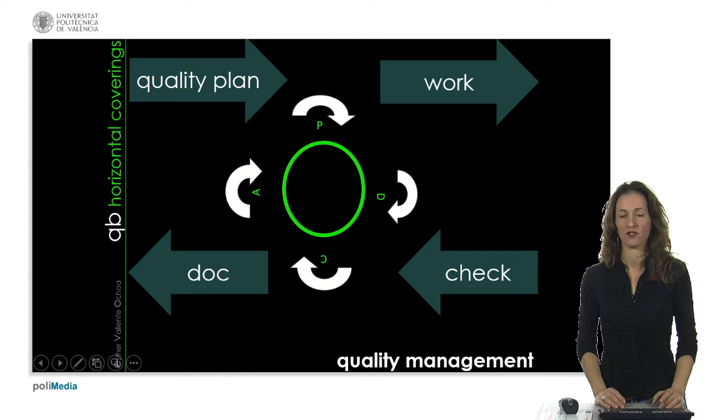We should think about the quality plan and the whole project management before starting the construction, the worksite construction. Then it's time to check all the activities, and in case we find any failure or damage, we have to make a non-conformity report. This document is usually joined with a corrective action or a preventive action in order to repair the failure or to prevent the repetition of this damage in the future.

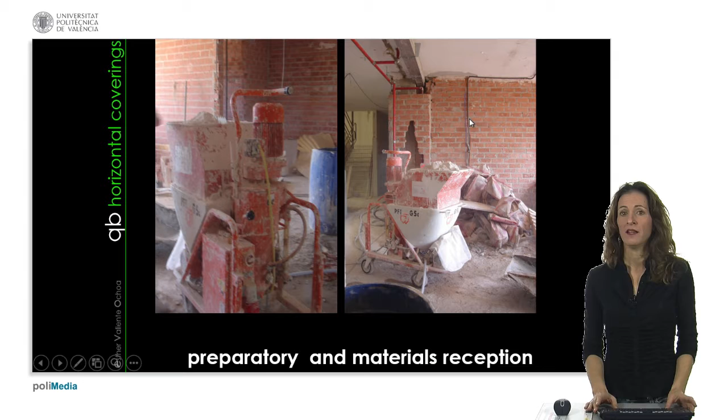Right now, let's go see the gypsum finishings in the horizontal finishings. First, we have to think about the preparatory work and the materials reception. Think about the structure, facade, all the partitions, even if this is a brick wall or a plasterboard wall, it doesn't matter. All the previous units have to be finished, all the building services have to be completely placed, and then it's time to start with the coverings.

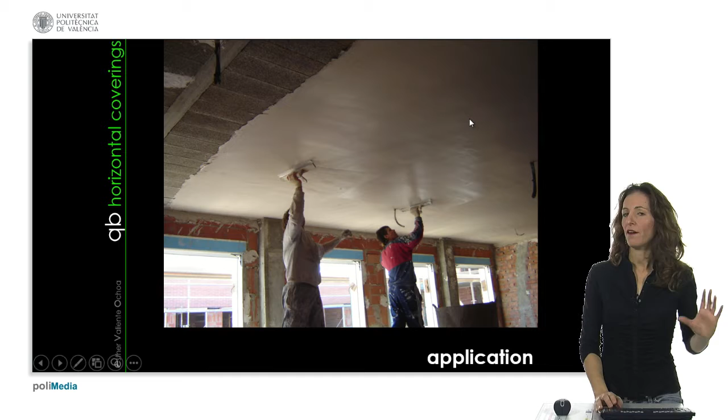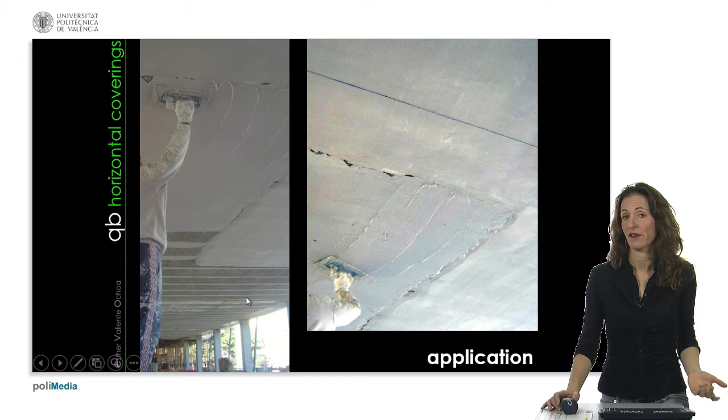When we are making the horizontal application, we have to spread the paste by hand, because when spraying it we can have problems with the fixation on the horizontal surface. In the first application, we have to cover the whole surface and try to fix the paste to the base. In this case, we have a reinforced concrete structure, which is the inside face of our floor or slab, and we are covering the whole surface with the gypsum paste. After covering this, we have to trim and cover the whole surface until we keep the surface in continuity.

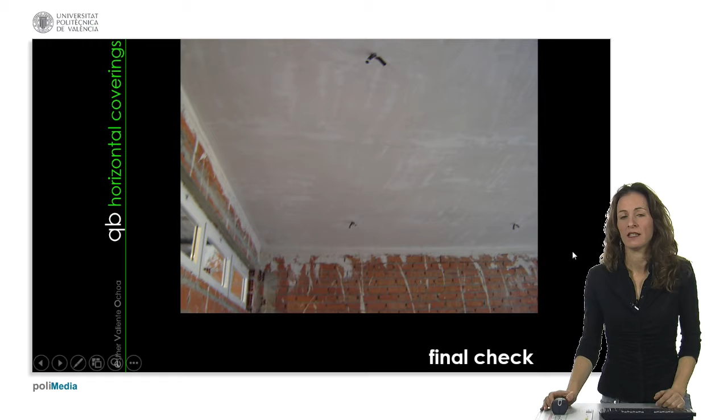It's time to wet and keep the moisturizing of our paste in order to have continuity and horizontality in the ceiling. If everything is fine, we have to be careful about where the building services are placed.

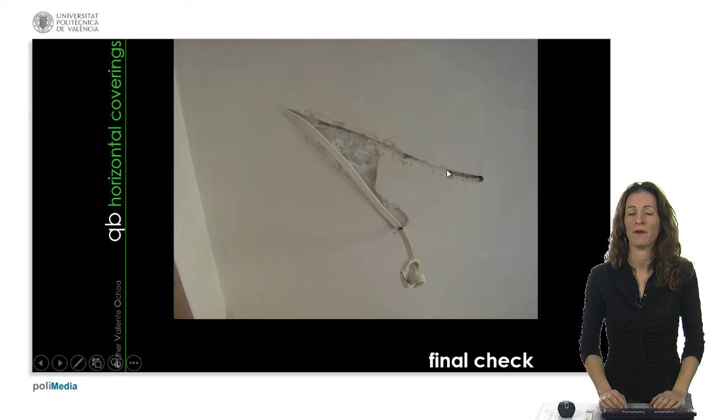In some cases, when we use electrical cables, the difference in temperature can cause a pathology or damage in our ceiling, and just cause a failure of the electricity. Where the cable is placed, we are going to have poor adherence, and we can end up removing it, having this trouble. If everything is fine, we can continue and mind the position of the building services before covering with this very thin final surfacing.

In the case of ceilings, it's very easy because we have a chamber in between the element and the final ceiling we are going to have in our stages.

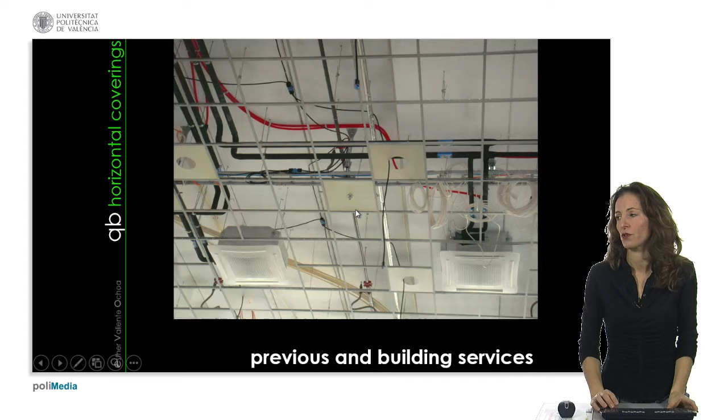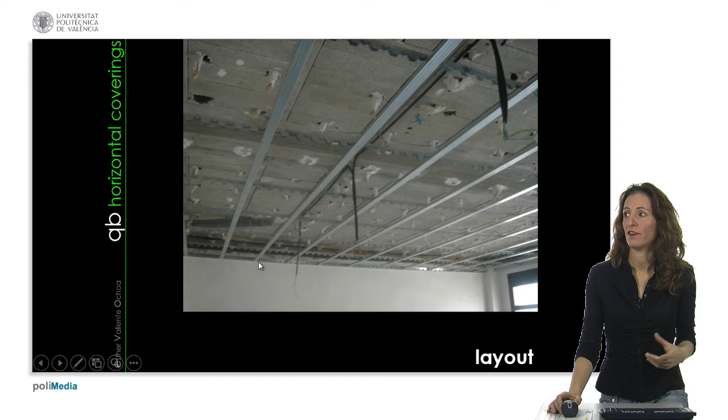We have to lay out the position of our ceiling depending on how many building services we are going to have. Then it's time to start with the layout, where we stake out with the profiles. We have to divide the whole surface we are going to cover with the ceiling according to the final shape and sizes of our panels.

In the layout we also have to fix all these aluminum profiles to the floor slab, to the resistant structure where we are going to fix the profiles, in order to be sure the structure is resistant enough to hold them in place.

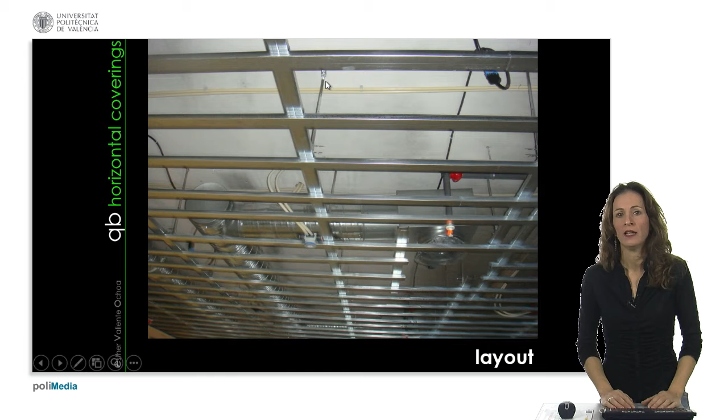Then in the layout we also have to check and test if the distance between all the profiles is sufficient, well placed, and we have the right position of the panels, because we have only a small tolerance in between, like one to two millimeters maximum. That's sufficient to move and remove the panel if needed, but otherwise the panel has to be completely finished, and if not, we can have damage or failure causing the panel to fall down.

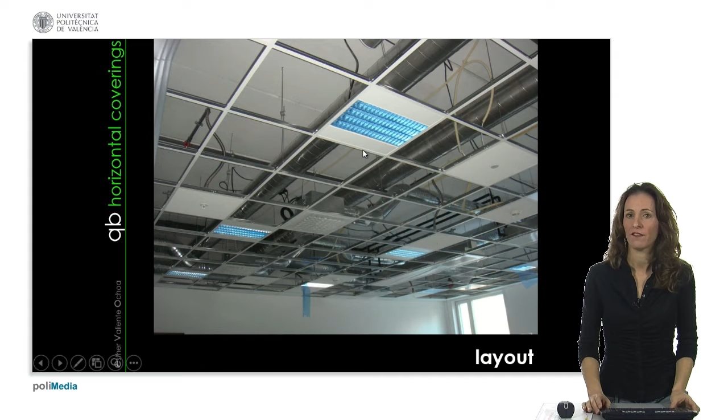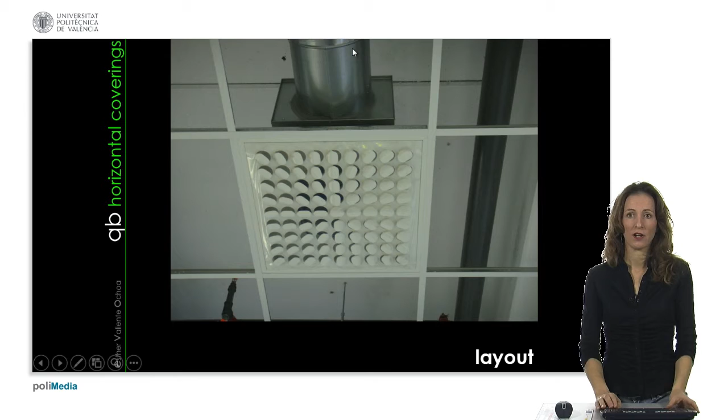During the testing time, previous to covering the whole surfaces, the whole ceiling with the panels, we have to test it in order to be sure everything is okay and we have not any joint or any failure in the huge structure of the building services.

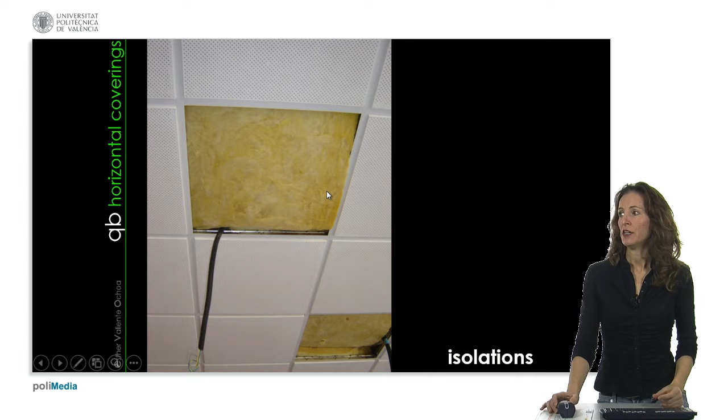Then it's time for the isolation. Sometimes the isolations are fixed directly to the structure, but in other cases they are in a sandwich panel or in a sub-layer in between the ceiling and the final panels. Here you can see these small panels with this micro perforation, and also we can see here the fiberglass that is going to be the isolation in this case.

In other cases, as I told you, we can fix the rock wool directly to the structure in order to keep the high resistance and the maximum protection in the isolation, thermal and acoustic isolation in our building. In between the profiles we are covering the whole surface and we are keeping it in the right position.

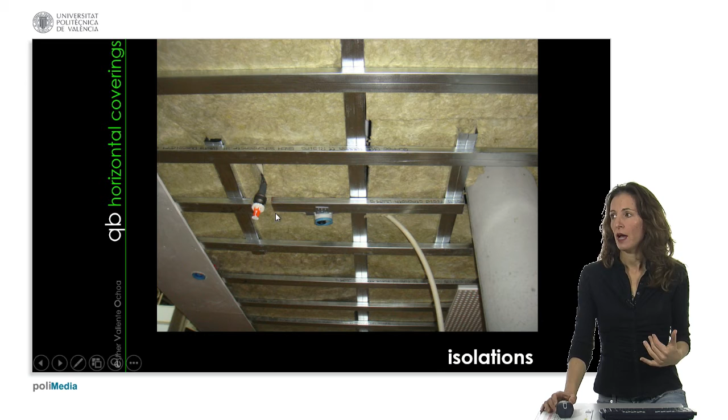Then we have chamber enough to pass all the building services, fire alarms and all the building services in between, and place them in the right position behind the panels in the final finishing. In the cover we also have to mind the position of all the external building services and the point where they are going to be fixed, and place the panel thinking about the distance in between the profiles.

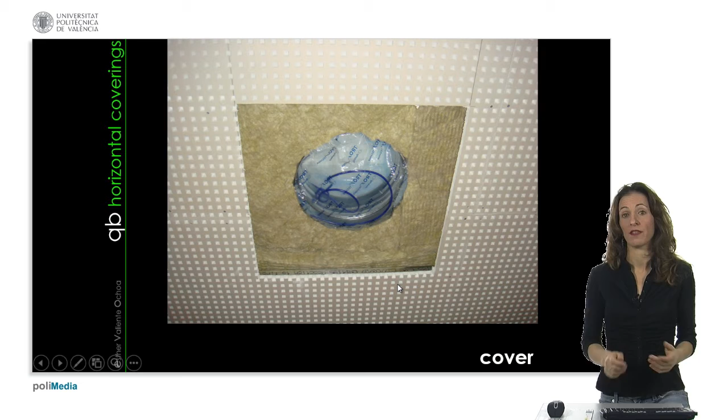Once more, in the covering we are going to fix the panels with a screw, the same as we did in the partitions with the plasterboard panels. But then we have to join and cover these small places where the screws are fixed.

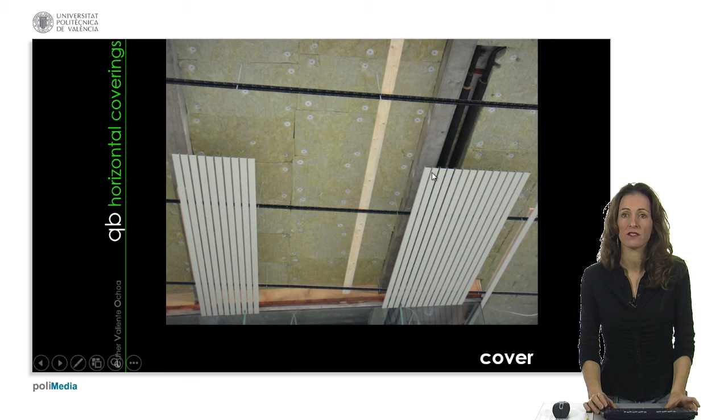Cover with different kinds of panels and even with these steel pieces that are going to create a very longitudinal, very nice surface, but it also has a breath and continuous movement of ventilation in between the building services. This is very nice because then we can move it wherever we want, and we have a very active and easy connection in order to have the maintenance of our building services.

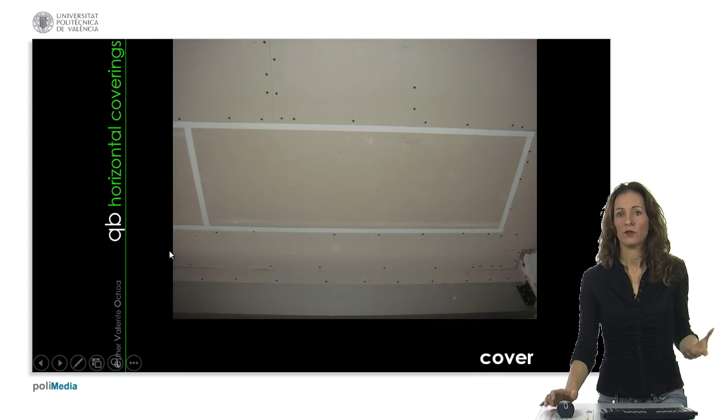In the cover we can also sometimes make a continuity if the design of our project requires it. In these cases we are going to cover it the same as we did in plasterboard walls, just fixing the panels with this screw, but we have to make small windows or small places where we are going to have a register in order to keep the maintenance of our building in the future.

In the cover, when we are in wet areas, we have to be careful because in these places we usually have some of the units and machines of our heating and cooling systems. In this case, the register windows for maintenance have to be a little bit bigger and very well placed, where in the future workers can do all the repairs and maintenance of these machines.

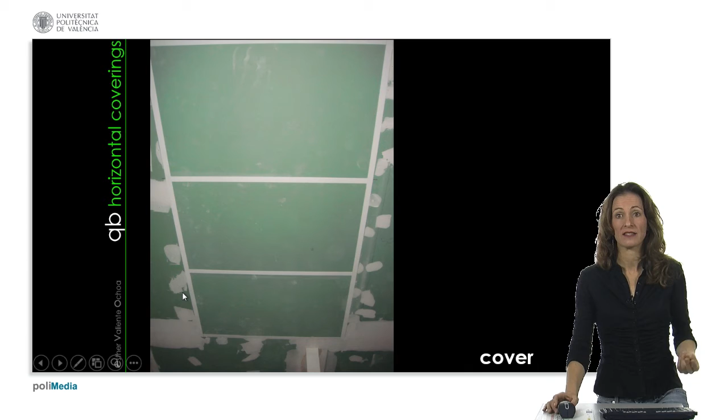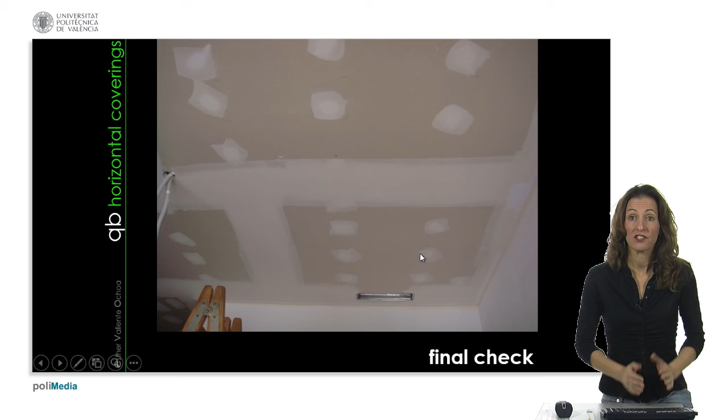Also, once more, we have to cover with this elastic mastic all the positions where the screws are fixed to the panels, and make the final check, covering all the screws and the joints in between the panels, and make the final revision and check if you have all the results from the tests of our building services. If everything is fine, we can place all the panels in the right positions and make the final check.

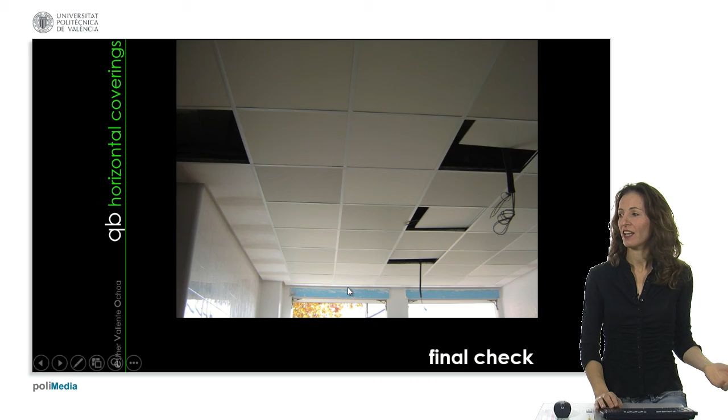Also in the case of these wet areas where we are placing the cooling and heating systems, or in the areas where we are using special panels for the acoustics and no reverberation, in special areas like libraries or places where we have extra isolation in our final surface inside our building. If everything is okay at the final check, we can pass it and give it as a good unit, well done, with a high level of quality.